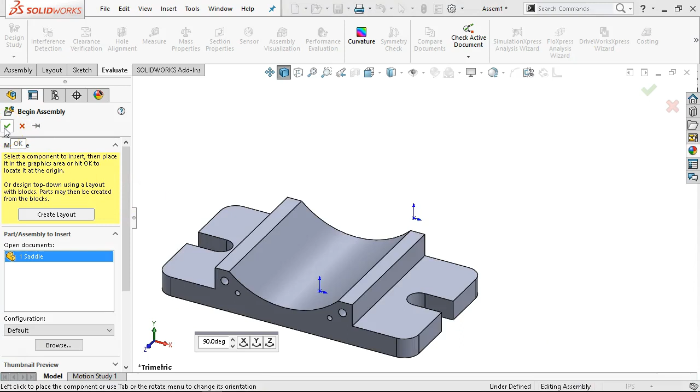And okay, so I'm going to be 90 degrees out from the isometric that was in the view. I don't care. Right? It comes back to if it's pointed this way as opposed to this way, we'll rotate it to that position and put it into the drawing or the assembly, or from the assembly drawing, drag the isometric to the left instead of the right. It's not a big deal. All right, but I want to make that conscious choice up front.

So again, from the CNC manufacturing, I eliminated the upper boss. We'll have a hardened washer or something to seat to. The radius is over the top and on the inside. If I was going to do anything here with a radius, I might use a bull nose or an end mill with a nose radius on it, so that it would put just a little bit of relief. But I'm not looking at this from a lot of load for whatever it is that we're grinding, holding on to. I don't see this as a potential stress riser or critical stress riser, so I'm going to bypass that.

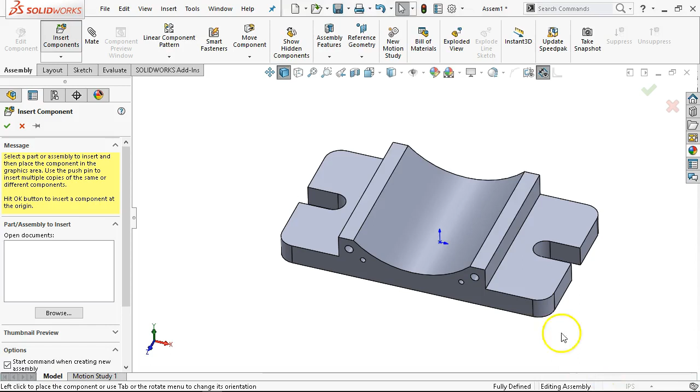All right, so next piece is going to be the center. So let's get back over to the assembly, insert the components, bring in the center compound member, place it, and because I did these on the origin, I do have the option of aligning plane to plane. So from the center plane, I can look front plane of the part to the front plane of the assembly, go into its mate, and that should put us on center line.

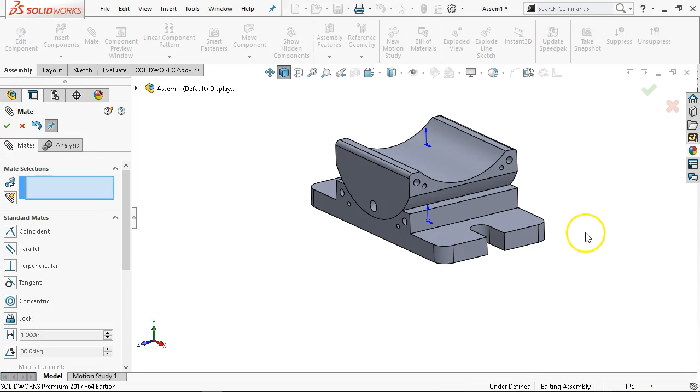Now there was also some extra relief and some extra geometry in here that I want to check for. So let's go arc to arc, and those will be concentric. And I do want this to be able to rotate, but not just yet. So in that case, I'm going to find the right plane.

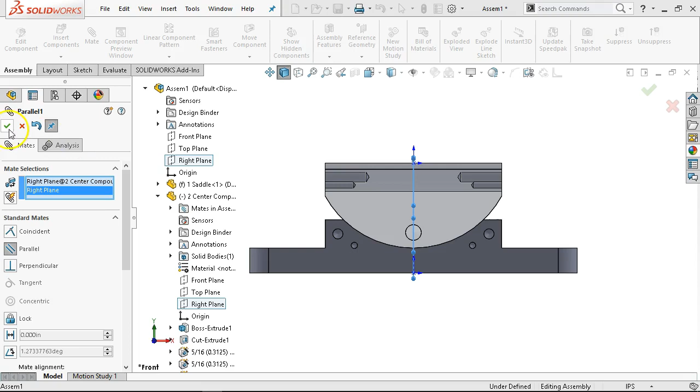And one of my strategies, again, is instead of going directly to coincident, if I use parallel, parallel is easy to identify. All right, so if I make that parallel, that would be something that when I switch over to my dynamic, I want to see what the range of motion is. I want to put limit dimensions in as I start to set up from the default, everything being static in its fixed position, to moving over to a dynamic assembly. It's going to be those parallels that I can look for instead of having to search through however many coincidences.

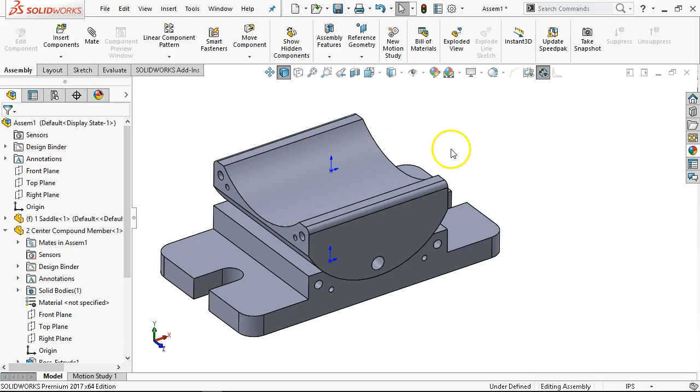All right. So if I did this right, I should see just a very few nominal distance, 3/1000ths. Hopefully that is in instead of out. Kind of hard to tell until we zoom up. So I have just a little bit of relief there. That seems like a reasonable clearance. When we get over to the evaluate and start looking for some of those clearances, I want to kind of physically measure, but cross it off my checklist before I get to the interferences. All right, so that gives me the first position. We'll go ahead with the upper.

Okay, so that one still has the sketch marks. That's making it a little complicated, so let's go ahead and hide those. And I haven't set up any display state, so when I hide out of the assembly, that's going to be hidden in the part. I can set up a display state that says show those tick marks, those angular marks, if I want to see them, but I can't really get rid of the center lines and the other construction geometry until I get to that point. All right, so in this case, we want this to be able to rotate, and this is going to be able to move back and forth as well.

So my first guess, my first impression would be to go back to the assembly, but then I start to analyze it and say that that's not a good idea. All right, these two pieces are going to move together. So if I make this coincident with the front plane, then it's going to stay in that up and down position. It's not going to be able to rotate back and forth.

So in that case, I want to look for a comparable plane in the center so that as it moves back and forth, that's still not going to do it. Wrong one. Okay, so that one, the right plane. I keep guessing at it. Eventually, I'm going to find one of them that works. All right, so right plane of the center to the front plane of the upper. That looks like it would be reasonable.

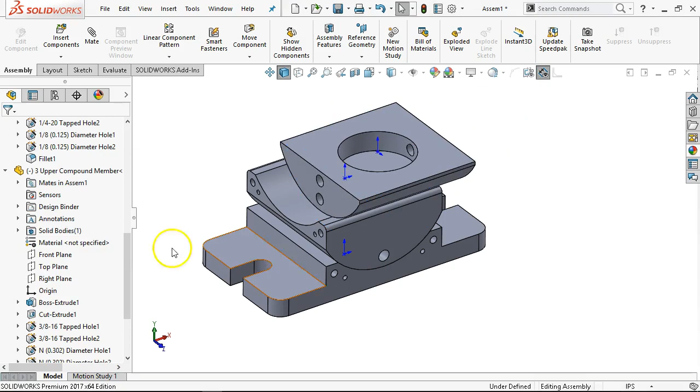It's going to be able to stay in position, and because I'm at that angle, it's moving a little bit weird. I'll go ahead and set for concentric, and now I expect it to act in that same arc. All right, so as I'm going through and doing the analysis, I'm not always going to guess right. But I'm going to keep a mental tab, a checklist of, yeah, that seemed like a good idea at the time. If I need to go back and pick something up, then that's going to be where I'm going to start to look, is the relations between these two parts.

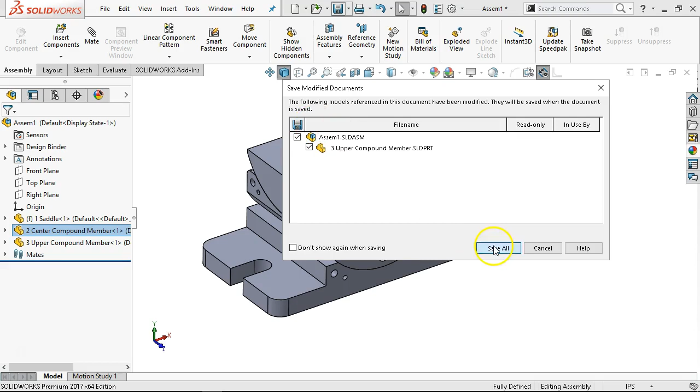All right, so in that same vein, the front plane of the center, and we'll scroll down to should be the right plane or back to parallel. So again, I'm looking for that very static. I don't want anything moving. I'm more concerned with the clearances, finding any interferences in the stack up. I want to be able to identify those. So let's go ahead and save this. And this is going to be the tool vise, and we'll go ahead and put a 1 on it so that I can do this again.

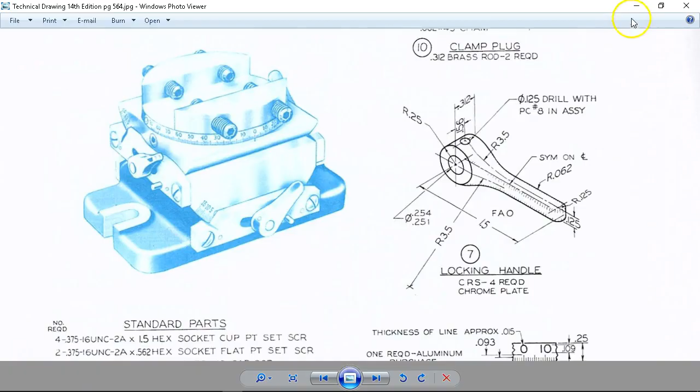All right, so let's refer back to our assembly. We have the two plates on the bottom, and then the one with the relief on the top. So let's go ahead and put that in place, and we'll start to define where those hole locations are. All right, so let's see, item 4. I guess I need to figure out which ones those are. So items 5 and 6, 8, 10 for the plug. Oh, and the tool holder was up top. Yeah, we'll go ahead and bring that one in.

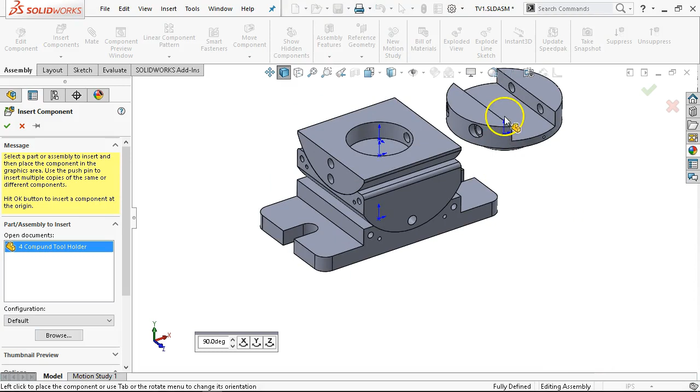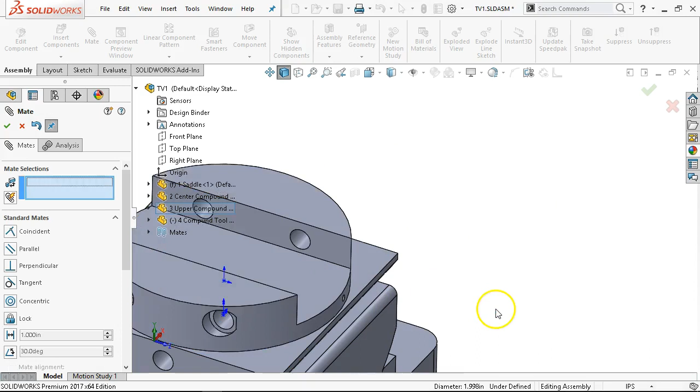All right, so it's going to sit in position, coincident, back to the bases. Concentric is probably my best choice there. Oh, didn't hold down the control button, so let's get that in position. All right, so all the little blue dots for the origins are starting to annoy me, so they're getting ready to get turned off. As far as position, I know that the protractor scale overruns past center, so that's about its position. And staying with that stack up, we'll go with the right plane of the holder and the right plane, and again another parallel.

Okay, so those are all of my major components. Go back in and hide the origins so that kind of cleans up. And we'll see if we have the clearance. That one's about 4 thousandths. That one was about 3 thousandths. So we're still in that same range, even though it's a little on the weird side.

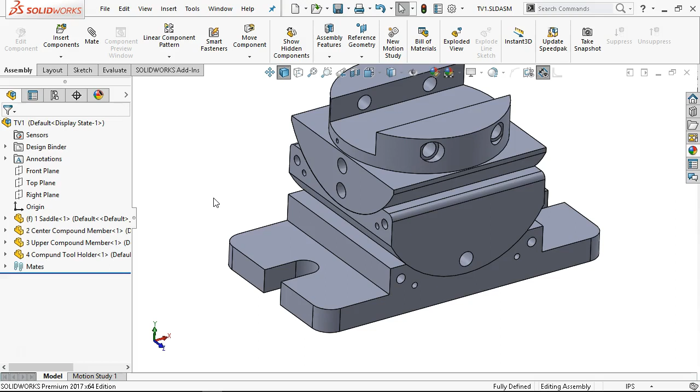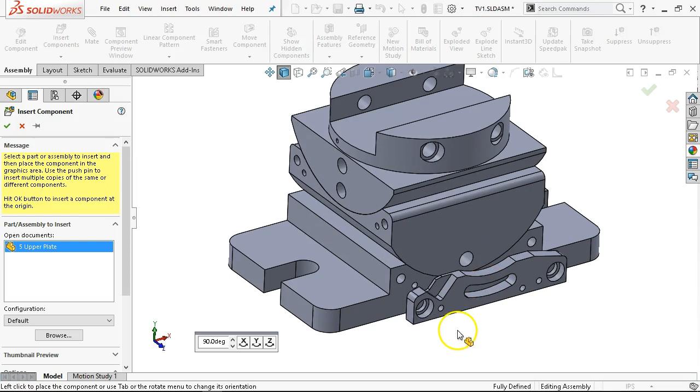All right. Next piece is item 5, insert component. And you can tell that I'm falling into my old habits of insert. The toolbar. I have a long standing on the pull down, so whichever one works. All right. So control coincident. We're going to look for that hole location. And I thought these were a little bit on the large side, but it's relying on the pin. So I want to check for alignment by going concentric to concentric, and then the hole location for the handle.

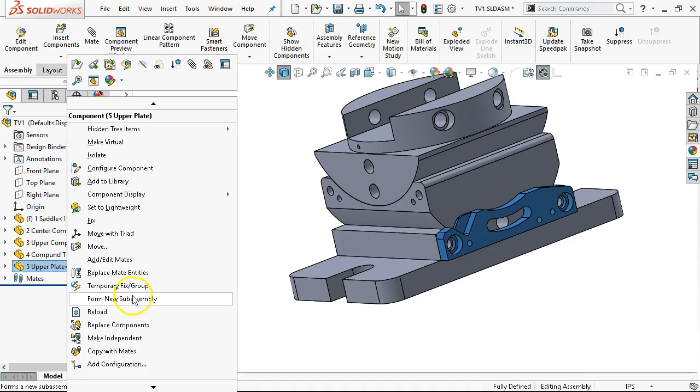All right, so completely missed on that one. Let's go ahead and bring in the other side, the 2 lowers. Oh, that was an upper, so that didn't work. I don't use it often. I probably would have just either undone or deleted the relations and moved this over. There is in our pull down a replace components. All right, so if I browse to the lower plate, I'm going to try to replace the component. It's going to reattach mates if it can identify. So the face was identified.

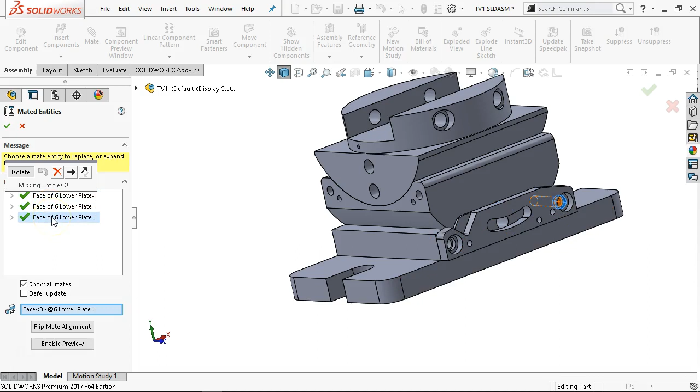The concentrics were identified, so that's all good. We go ahead and accept it. All right, so the difference was this lower one doesn't have the relief for whatever screw goes through there. All right, so keep in mind that you have that ability to replace.

All right, so that one goes in. Control select coincident. All right, but in this case, the alignment wasn't there. It put it inside of the part. So I didn't go into the full mate. I want to expand out, look for the mates folder, and then flip the mate alignment. All right, and then same thing, I want to check for those hole locations.

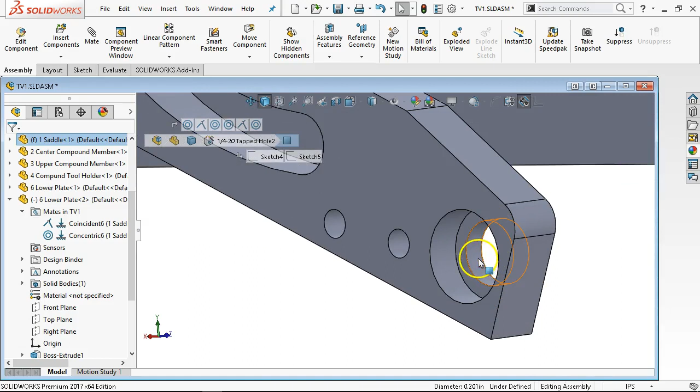So we're going to set for concentric, and really the 1/4 inch holes are a lot more critical than what I'm doing for the counterbore holes. But I need that initial position even to get them started. So, all right, so I have that first piece of information that I can build in. All right, so we're going to chase that one back.

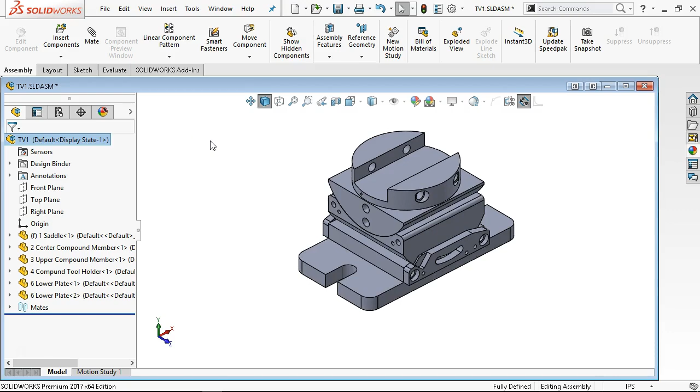All right, so insert components. We'll do the upper plate. I haven't set any mate relations for these items, for these components. Mate relations fall into the category of if we're reusing this part across a variety of tools, and maybe it even goes into the design table or the design library at some point, then the mate relations become a little more critical.

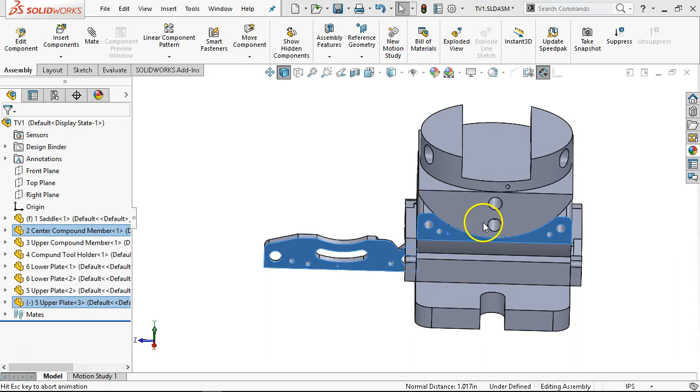Okay, so concentrics. All right, one more upper. And should have just done it the opposite way, then I wouldn't have had to flip the mate alignments. All right, but good example, flip mate alignment, put it in position. Got a concentricity, we'll rotate that up just a little bit. Rotate it up. All right.

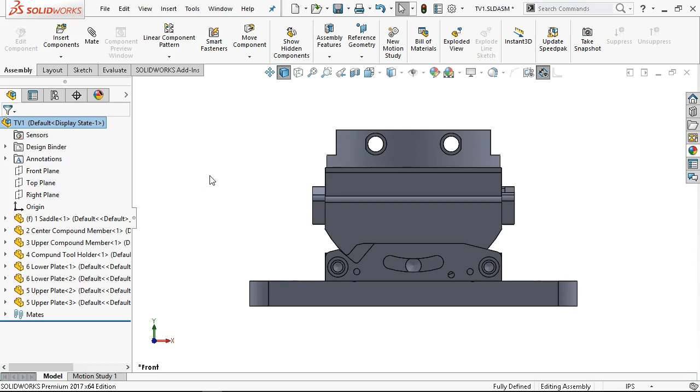So we're starting to cross off components in our list. We're getting down to the last few. All right, so that goes that way, that goes that way. On the center compound, oh, did that one get it? If it did, I did not catch it. All right, so pretty much the tick marks in the 0 through 15 that I put on this one, I'm going to have to grab that sketch and copy it over because it's going to have the same tick marks.

All right, so the alignment to this point for our reference, 15 degrees off of center. So let's see, we're going to check it for this one then. All right, I really just need one of them turned on, and actually I don't even need the numbers. Go ahead and show. All right, so just a little bit off on that alignment. We want it to be pretty close.

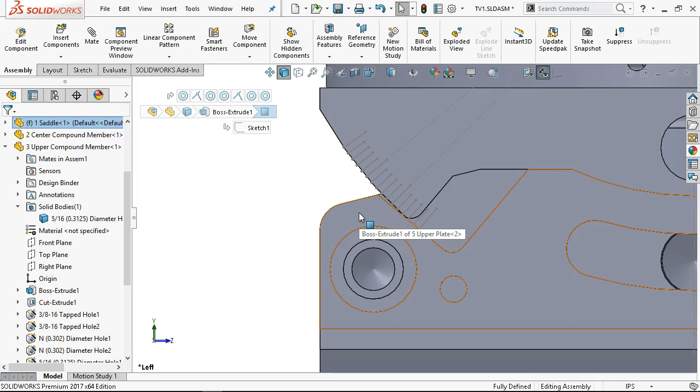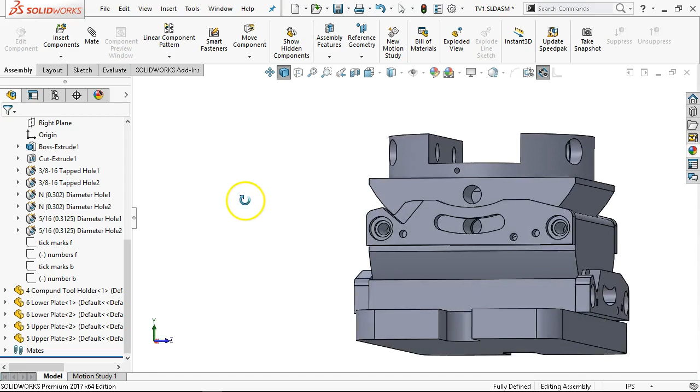So if that's our 0 mark, I need about another degree, a little over a degree, to make that alignment. All right, or I need to check this and pull it back, whatever that angle was. All right, so that being our reference, that's just a little bit off. All right, fasteners, not yet. We still have a few more components to bring in.

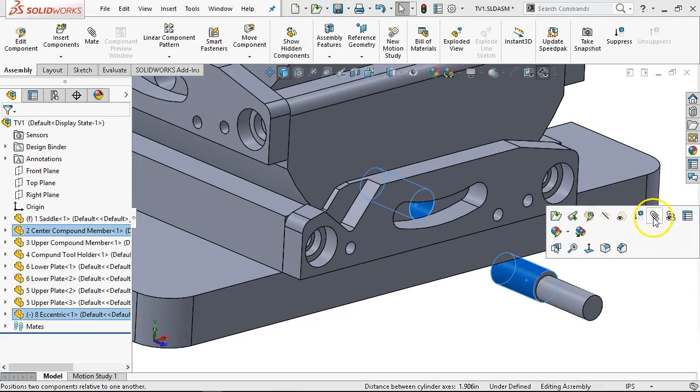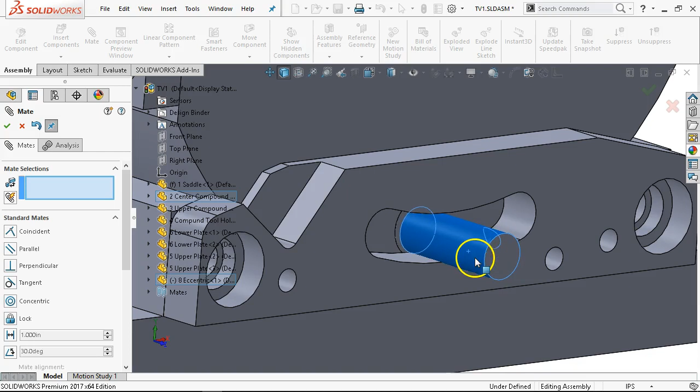Okay, so I'm going to set that one up for the mate. So that goes in first. And that really can't stick out, so it's going to have to be flush. That's an interesting way to do that. All right, so since I have to do 4 of those, well, 3 more anyway, and I've identified what the mate reference can be, I'm going to go ahead and put one in.

So this edge, reference geometry, mate reference, edge default mate any, and go back and save. All right, so when I drag the next one in, I want to be kind of close to the hole location. It's reversed, so I got to do the contortionist thing on the fingers and hit the tab button at the same time. That'll put that one in position. One more to there, tab.

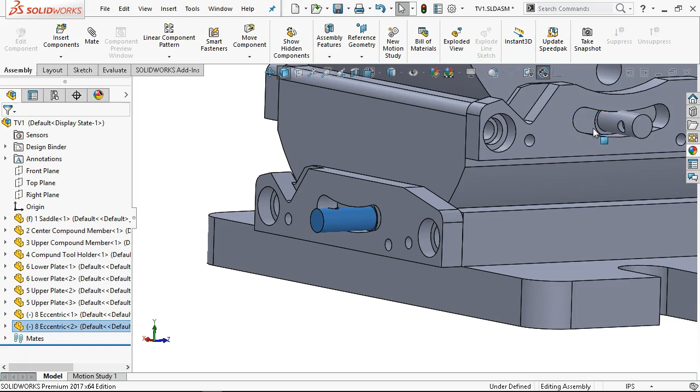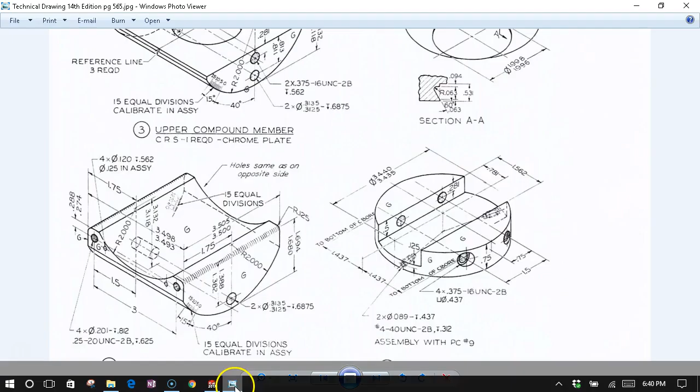And tap. Now back to that whole design for manufacturing thing: based on the cost of that eccentric versus drilling and tapping a hole, and the cost of a handle versus the locking handle, kind of the specialty custom items, I'm really leaning towards, since that was... where did it go? They had 565. I'm really leaning towards maybe a quarter-20 or a quarter-28 to replace that with a standard handle. That seems like it would be an expensive piece that we could replace and bring the cost down and have the same efficiency.

A washer up against this, I think these were cold rolled steel. Washer against that face, providing that compression. 3/1000ths of clearance, whichever one pulls up tight. Yeah, I know that there was an upper and lower limit on those. So whichever one gets tight and flush, then the stack up kind of shifts in that direction.

All right, so that's a candidate, and this may be where we could go back to the design binder. I've used the design binder to take notes as we go, but it's probably as easy to have Word open in the background, or just scribble notes somewhere. All right, so we're pretty good there. So I'm going to leave those open. Item 7 can come in now.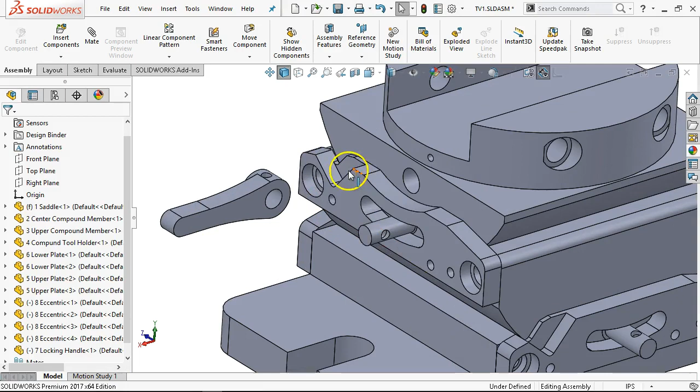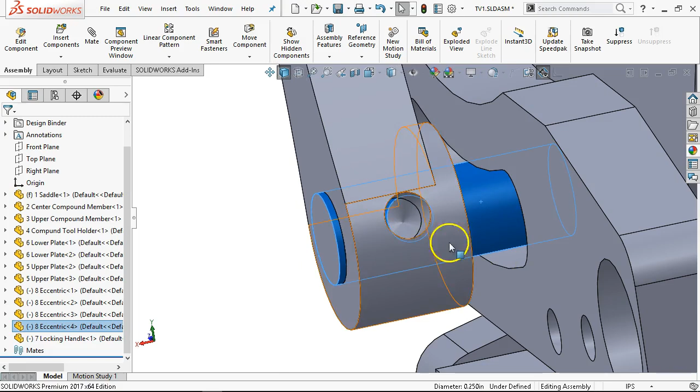So insert components. Bring in the locking handle. All right, so the locking handle has the relief for clearance. We'll go back to concentricity. Another candidate for the mate reference, and it's moving away from me. So let's bring that one back. That was just trying to be annoying. And that was just a little bit of, there we go, just a little bit of spot face for it to engage into. So I think we could probably purchase a handle for the cost of making this two-piece assembly. And it would probably be much more cost effective finding something that's already close.

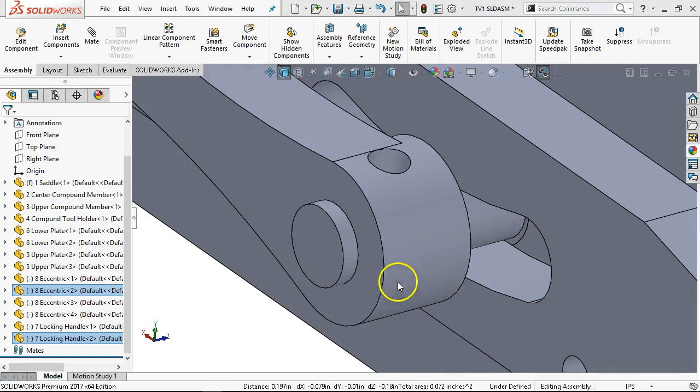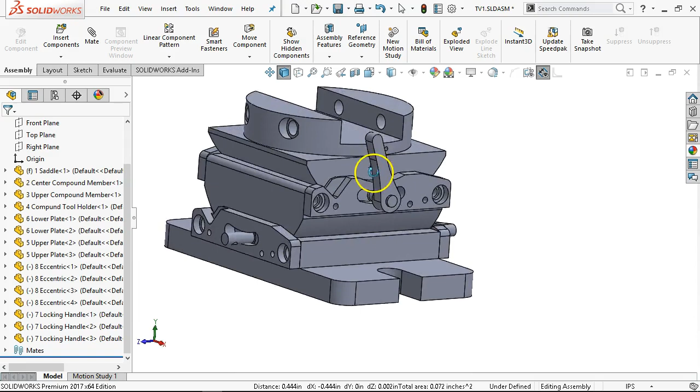All right. They do look like fun to make, but not that much fun. All right, so concentric. Those are all going pretty good in the same directions. All right, the other thing would be the handles. So what was the note on that one? Let's see, drill with piece 8 in assembly. So I think the issue here is that, well, as long as it will turn. Nope, it contacts. All right, so if we get this too far out of alignment on the eccentric, or even on the threaded holes, we're not going to really be able to clock threads to the stage. So this handle is going to have some adjustment to it. So that's kind of an unresolved issue, to be determined.

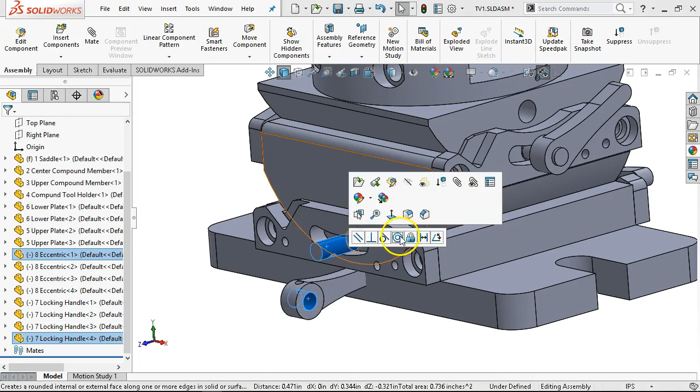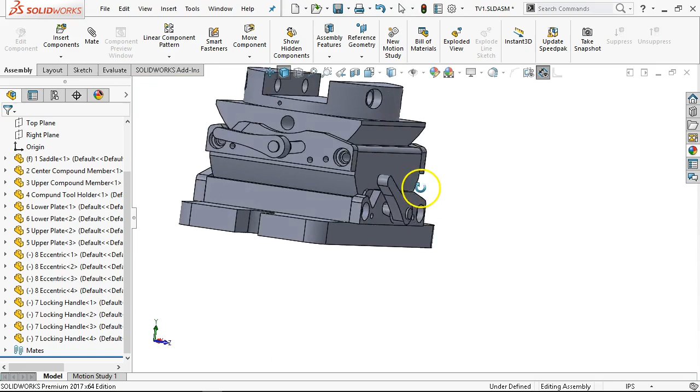All right, so one more, and we'll bring that in. Go concentric. All right, so that has a good amount of clearance. So based on that much clearance, I'm not sure why we need that heavy a step. We could probably get away with just making that profile, putting a nice deburr on it, and calling it good for the lever. All right, so we'll put those in some position. I'm not going to worry about making all of those parallel. And mainly the reason that the 3 center sections went parallel is because as you start moving these things and it sees that this can move, you're going to have that accumulation of movement.

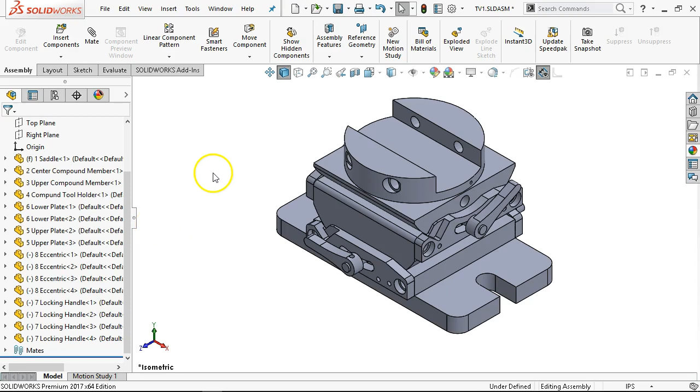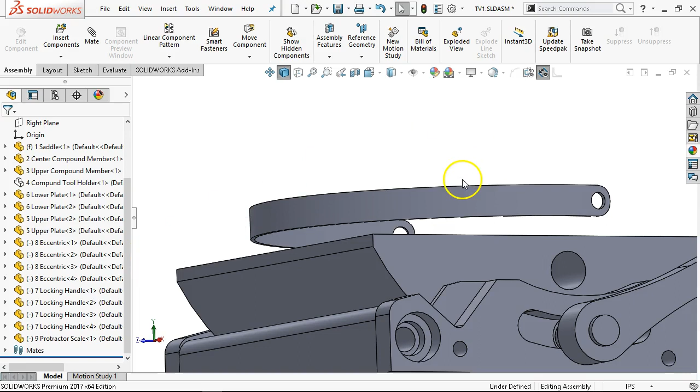All right, so let's see, insert components, item 9, so we're up to the protractor scale. So let's see how that turned out. All right, so the sheet metal piece wrapping around the body. Gonna set concentric, and lost it in the part there a little ways. Really would like to hit the bottom there. So one of the things, when was it, 2015, 2016, if you hover over top of a part and hit tab in the assembly, it goes away. And that wasn't really the one that I wanted to go away, so shift tab brings it back. Tab makes that one go away.

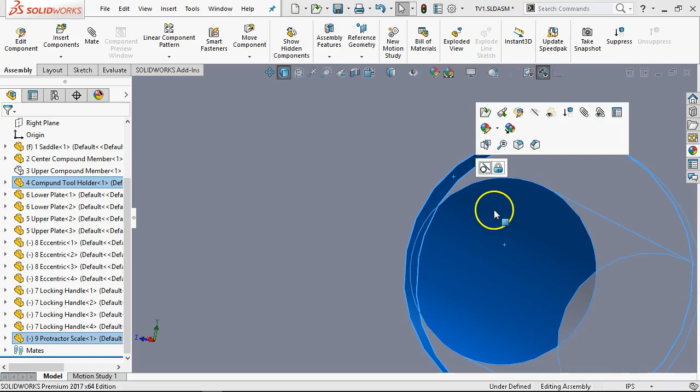All right, so we're pretty much going to pick whichever cylinder. So those can be coincident. And depending on how this generated, nope, it's still going for tangent. That means that when the sheet metal wrapped that cylinder around, there's still some kind of compound curvature in that whole location. So back to our planes. So there's a front plane that would work, and we're going to go back up to the tool holder. Front plane, no. Right plane, yes. Coincident.

All right. What I was saying about the positional tolerance, that 440, 112 going to 136. The 136 hole really could probably be dropped back to a 120, 122, 125 at most. I don't think it needs that much positional to be tight. And chances are to make this thing stick, going to put a little bit of glue on the backside or some kind of attachment through the whole face, and those will just keep it in position. All right, so go back and show.

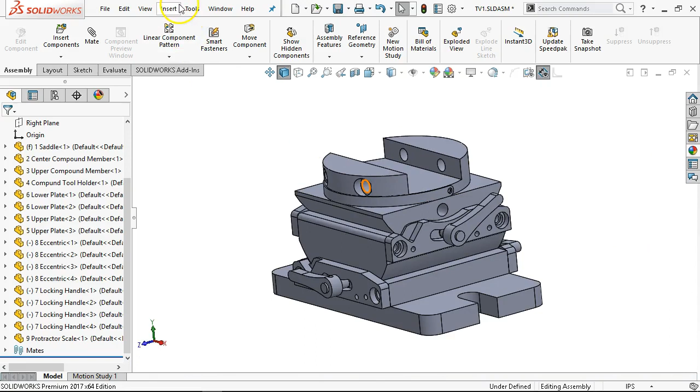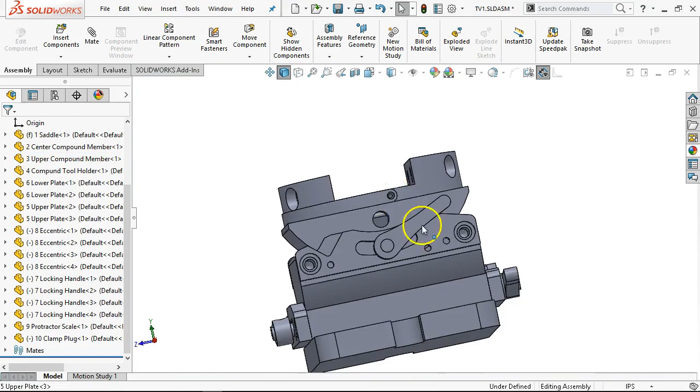All right, we're getting down to the last of the pieces. So interior, and this one's going to be a little bit interesting. So insert component, we brought in the protractor scale, so that leaves the plug. All right, so this plug goes into the through, and I lost it. So let's go into our move components. So by selecting it out of the feature tree and from move components, I can extract it.

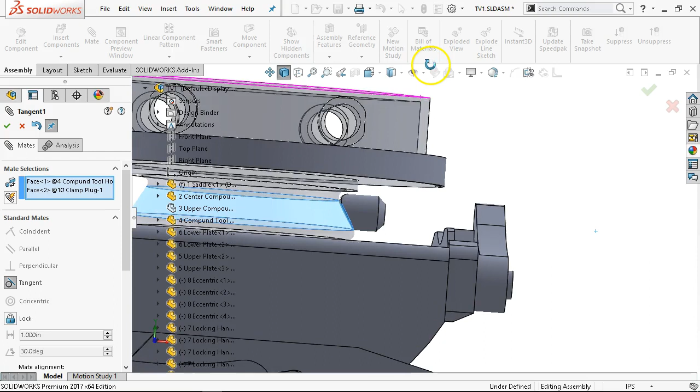All right, it is going the wrong direction though, so we're going to flip the mate alignment, put it in position. Should be able to hide that. Find that curved surface back to that planar surface, and those can be tangent, maybe, or not. Okay, so did it pick up tangency and did it locate correctly? All right, so it's got the angle. That looks pretty good.

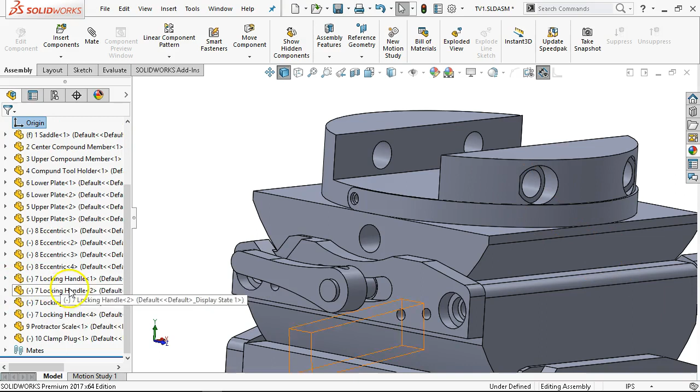All right, so find an open spot, Shift Tab brings that back. We'll go to the clamp plug, set the mate. So let's go ahead and flip the mate alignment. And if I can see it in there, which I think that's it, and can control select, I can get back to tangency, and we just need to double check that it went in correctly. Okay, so those are the angles. It's going to do the pull down, and we can do the Shift Tab. All right, so far so good. Make sure to save.

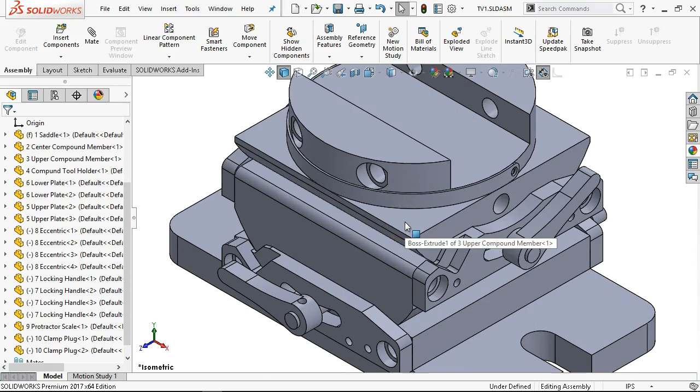All right, so what is left on the clamp plug? We got tangency, but it's still under defined, so that's going to be one of those weird ones that it really doesn't move, it doesn't change position, but it's probably because of the combination of the tangency and the concentricity, it's not going to go fully defined, and I'm not going to chase it.

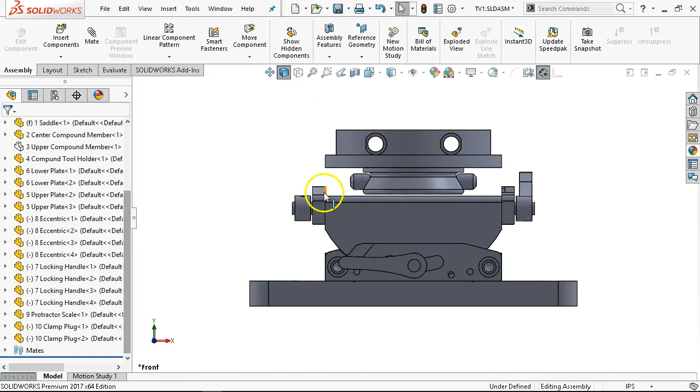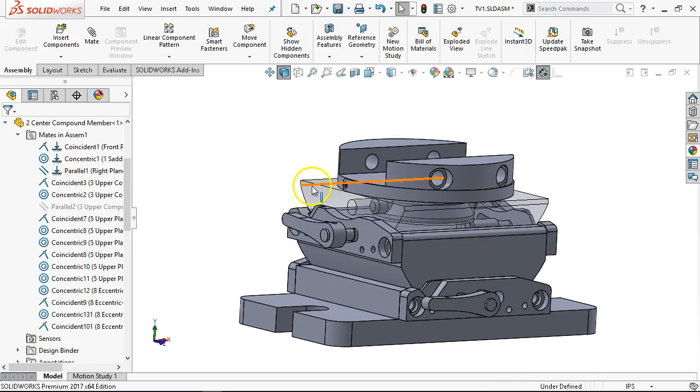Okay. So the test, we go back to the upper compound member. One of the tests will be to identify that parallel and suppress it, and see if that plug doesn't come shooting out on one of these. So let's see, I would like to go transparency. All right, so that's looking pretty good. Yep, got to rebuild. So I didn't like something when I started moving that. Alright, so there was the mates. That's going to keep, nope, that one's okay. Suppress. Nope, didn't get it. Oh, that was the upper. Okay, so unsuppress.

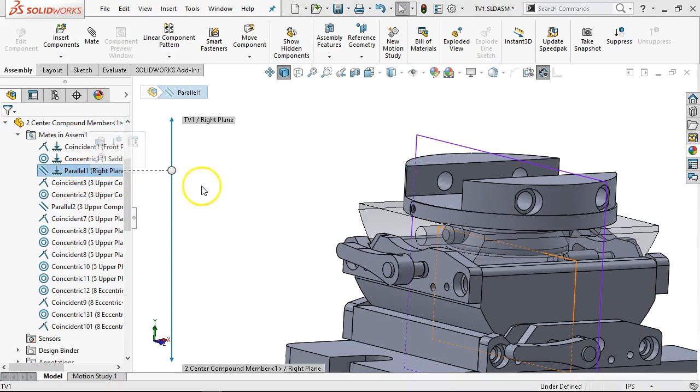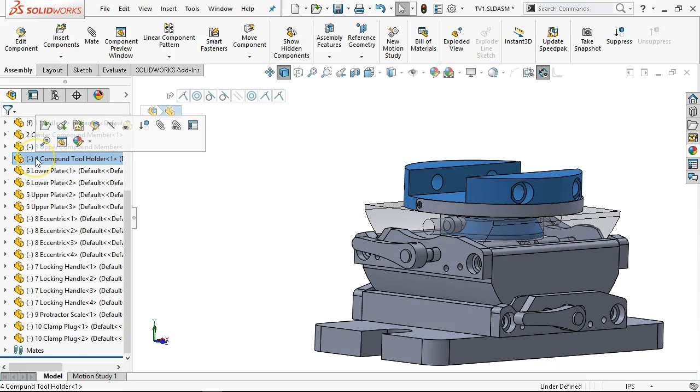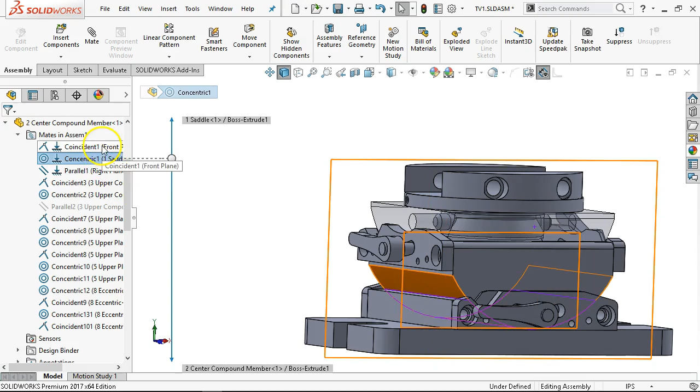Okay, time to set the configuration for the dynamics, so I don't have to chase the parallels too far. All right, so let's go ahead and suppress that one. Now it's not giving me the fixed, but it's not moving either. So I didn't think there was that much of a stack up of parallels. Compound, center, let's go one more. Now that one needs to be, okay, so that positions back to front.

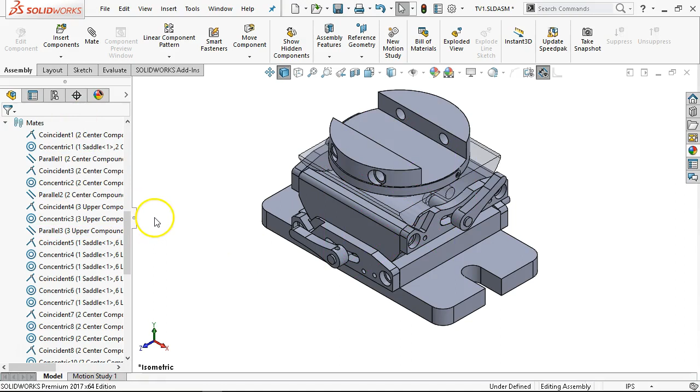Okay, so maybe I should have been checking those along the way. So one of those came in. All right. Well, I'll go ahead and unsuppress those. So I'm not sure what I added, but we're not there yet. All right. So dynamic will be the next challenge.

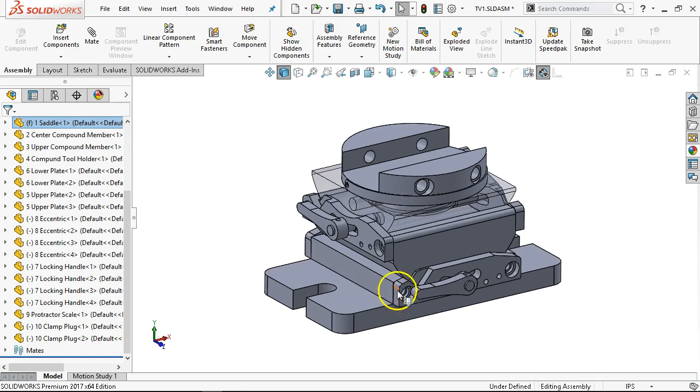All right. So I'm going to jump over to the toolbox so that we can finish out the hardware. And our hardware list for 3/8-16s and hex. So put that back in transparency. All right, so quickest way, we're going to go back into the design library. If I select the toolbox, we can do the add-in now, which is the same as coming over to the SOLIDWORKS toolbox, which is the same as the pull-down for the add-ins and telling it to add the toolbox library.

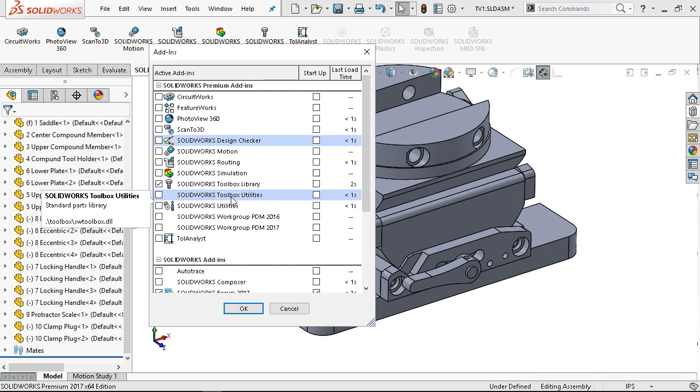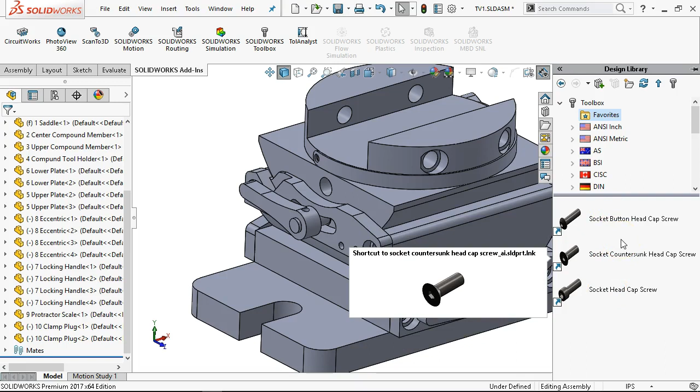The toolbox utilities are the life expectancy for bearings, the O-ring grooves, internal, external, and O-rings, and beam calculations, those types of things. So we don't need those turned on just yet, but they are there. All right, so under the design library, let's see, did I add anything to the favorites that's usable? Nope, couple socket heads, button heads, no set screws as of yet. All right, so back to ANSI inch.

Bolts and screws, I'm looking right at it. There we go. Set screws, they're going to use the socket, so we're going to stay with socket. And we want a cup point.

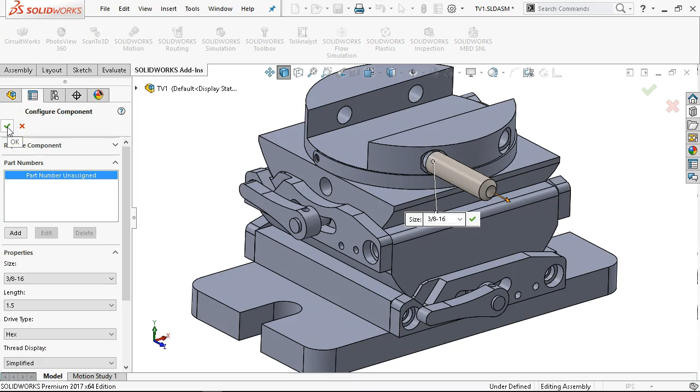All right, so one there. It's going to come up and ask me, 3/8-16 is correct, and the length is 1.5 inch. And that is not the correct direction, so we'll leave that one for now. Place the next one, hit tab.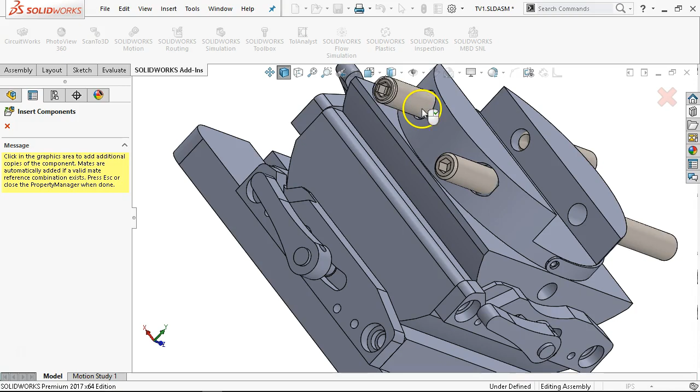Make sure the sockets are going the correct direction. Can't say why these need to be 1.5, either that or put them in the wrong spot. Well, I guess if they have to go almost all the way to center, they could need to be 1.5. Just didn't pick that up on the drawing though. Yeah, I guess. All right, I'm buying that.

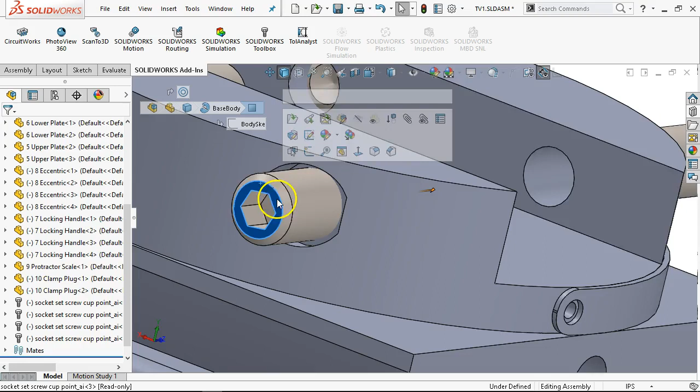All right, so we do need to come up with a reasonable position for it. So no distance, probably not going to find one on the cup, so that leaves the outside. Half an inch looks fine.

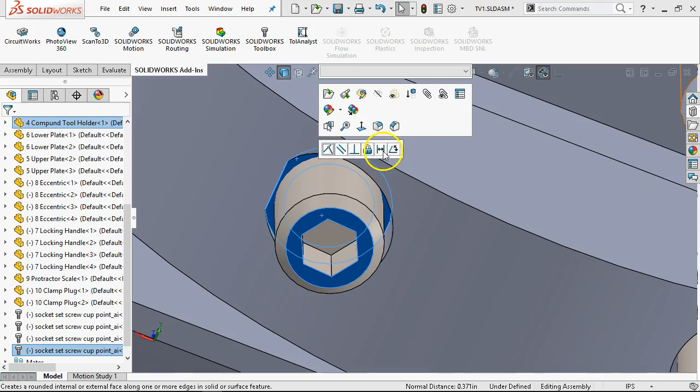I'm not so concerned with rotation, but again, when we start the dynamic, I really don't want these jumping out, getting lost, doing strange things. So I'm going to go through that checklist of will this restrain most of the motion, and again, if I needed, I can always go back and tell it to lock the rotation. First item was backwards, so we're going to flip the mate rotation, and there was the lock rotation if you don't want it to spin.

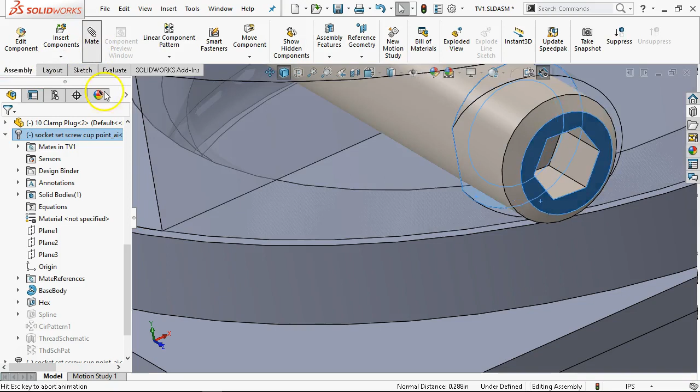So pull that. Oh, wrong one. There we go. Set up for the mate, distance 0.5, and one more.

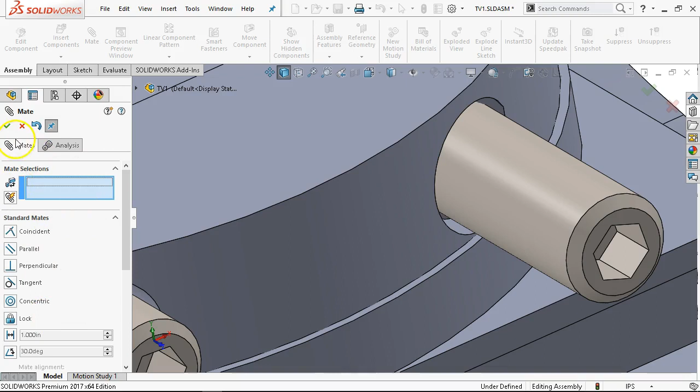Yep, that one stayed a little bit big. Nope, that was the second one, wasn't it?

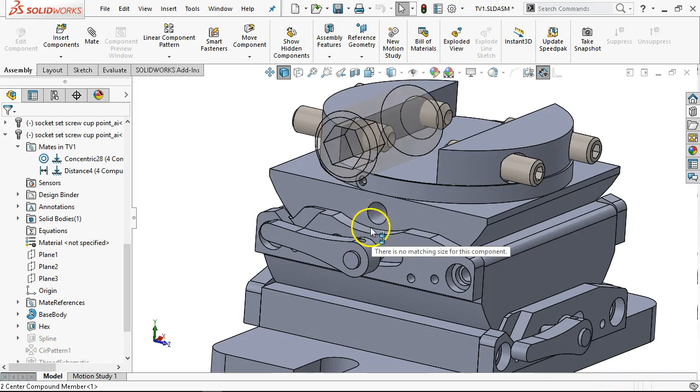Okay, then we'll take the quick route. All right, next one is a 9/16, so that's kind of an oddball size. It either jumps up to 5/8 or half inch. Cost-wise, probably not looking at all that much, but still, it's kind of we're at that point of making the decisions. So 3/8-16, I'm going to bump that up to 5/8.

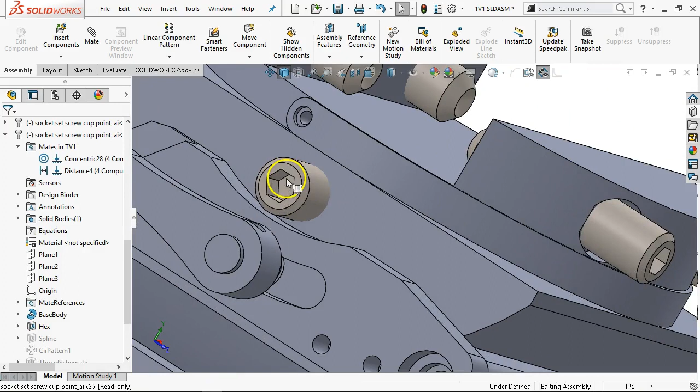Rotate around. That looks good. All right, for its position, since we started there, go to the back of that plug. That'll be coincident. All right, we've got plenty of clearance there, so I'm not sure why. I don't think it needs to be flush anyway. Ran into clearance issues, would probably go down to the half inch before I pick the 9/16.

All right, somewhere along the way we're going to do another save, and starting to accumulate hardware, so this is a good time to set the folder. So control-select all of those or shift-select all of those, and we're just going to call the new folder hardware.

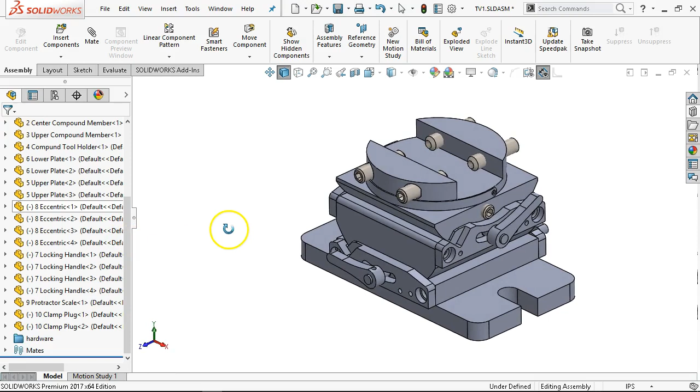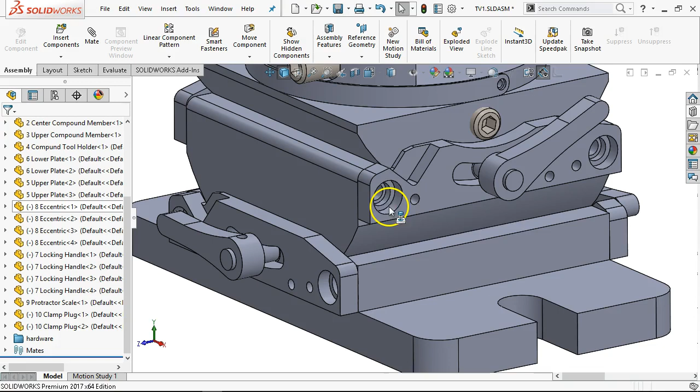All right, so I guess that was the reason for the size, is they're doing fillister for the location. So that's going to be a machine screw. Wow, that looks really tight. So let's go with the 1/4-20. I have to double check the head size.

I'm not going to hurt my feelings to use the Phillips as opposed to the flat. And that one was called out as a 5/8. Now we'll go ahead and accept, locate, and locate, and locate.

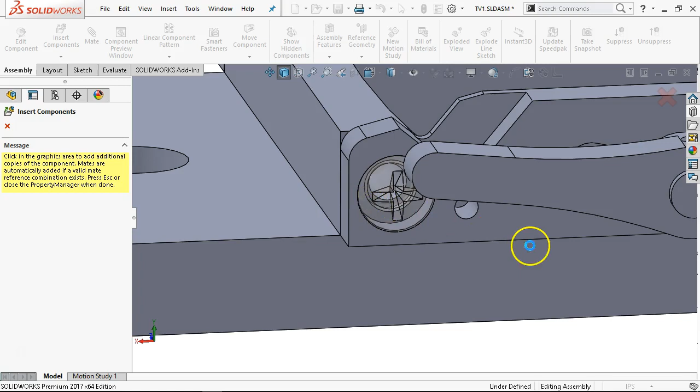All right, so interesting, let's see, we put that at 406. This is actually shown at 414, so would want to grab one of those screws and actually measure the head before it went into production on the pieces.

All right, so drill rod, drill or dowel pins. Yeah, the 440s, so those should be kind of interesting. Let's see if it'll pick up that at least one of those, but chances are I'm going to have to change it. And this was called out as a machine screw.

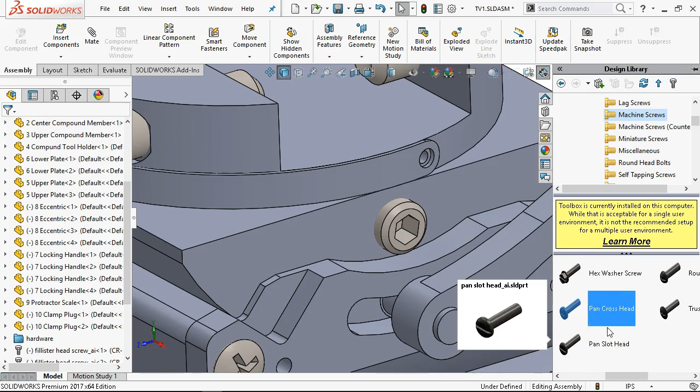So we're going to call it... since we have the Phillips and the slots, there is no matching. All right, so when you end up with this kind of elliptical shape, well, it dropped one in. It found something. All right, so it must have found most of the cylinder. And we're going to go 1/4 inch.

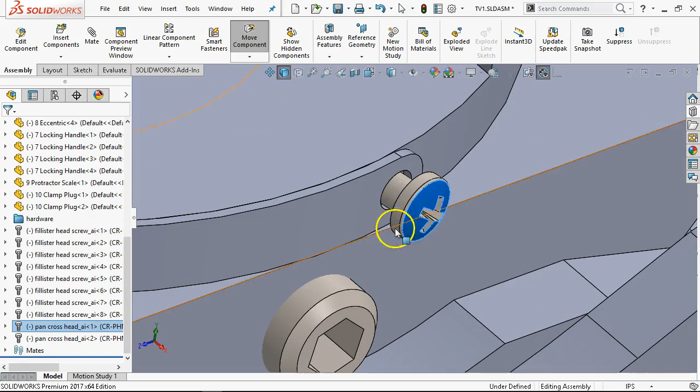Rotate over, set it for position. And as far as its depth, then we're going to set it for tangency. All right, and then this one should pull out a little bit and set for tangency. Save. All right, so the other ones are the pins. All right.